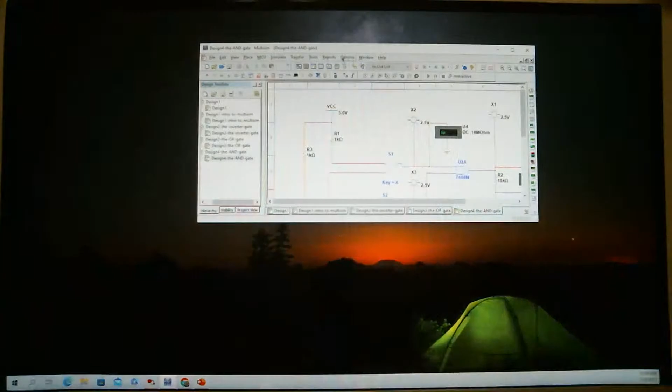All right, let me go ahead and minimize this. Give me a second. I want to start out with MultiSim. Okay, I'm going to minimize this for you and move this over. So making the switch here to MultiSim. Let me see if I can stretch this window a little more.

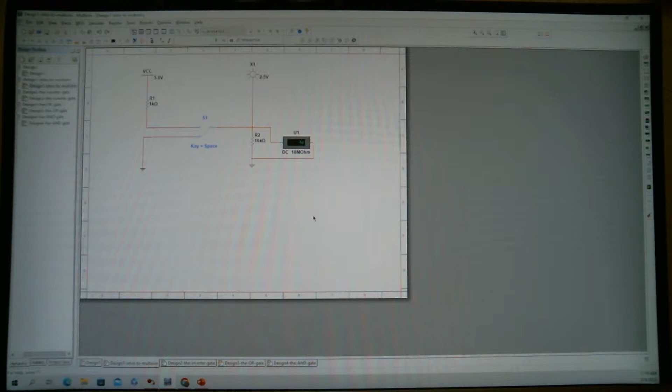Once again, thanks guys for your patience - my live streaming software wasn't working too well, so I had to work a way around this. Here is a design in MultiSim. Let me just start with the first one. So here is a little design, and this is using MultiSim - this is actually the desktop version of MultiSim.

What we've got here is a little small design that consists of a pilot light with a drain resistor, and basically you can power up and unpower that light with that switch, as you can see. But before we do that, we're going to have to run the simulation. So I'm going to run the simulation. All right, simulation is running, and there is the light energized, there's the light de-energized, right? And we have a voltmeter across that resistor, which is a voltage divider, checking the voltage. So this is what you could do.

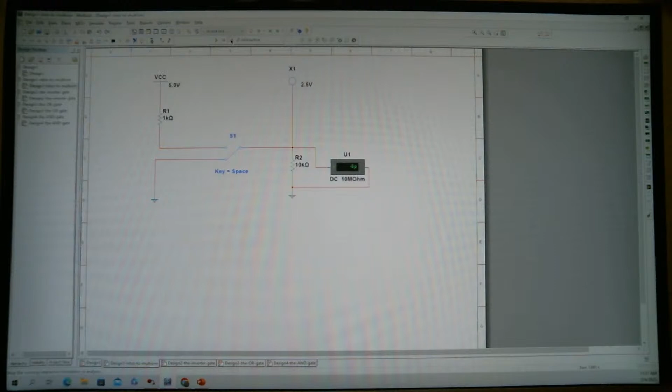They actually have 3D parts and components you can use besides just schematic. So this is an example of the use of Multisim. Let me do the second example with the inverter - this is a logic gate.

Let me arrange this. So this represents a logic gate, which is an inverter. And if we recall from basic digital logic gates, an inverter takes an input signal and outputs the opposite of that signal, right? So here we have an inverter that we can run and simulate, right? When the inverter has a 1 at the input, it provides a 0 at the output, right?

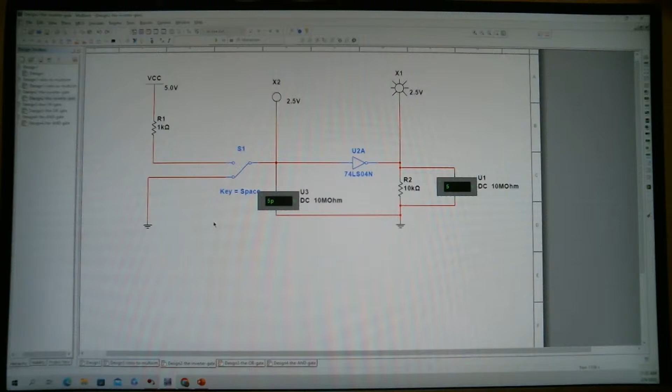So whenever the input is true, the output is false, right? And whenever the input is false, the output is true. So that's a design for an inverter, a digital logic inverter. Okay, so that's that one. All right. Again, I'm going to be working on maybe sending you guys the creation of these designs. It takes a little bit of creation. I'm just giving you a demo on the actual operation.

Okay, so here's another digital logic gate. This happens to be the OR gate. If you recall, the truth table for an OR gate has 2 or more inputs. And the idea is any of the inputs of an OR gate has to be true so that the output is true, right? In other words, if the inputs are false, the outputs will be false.

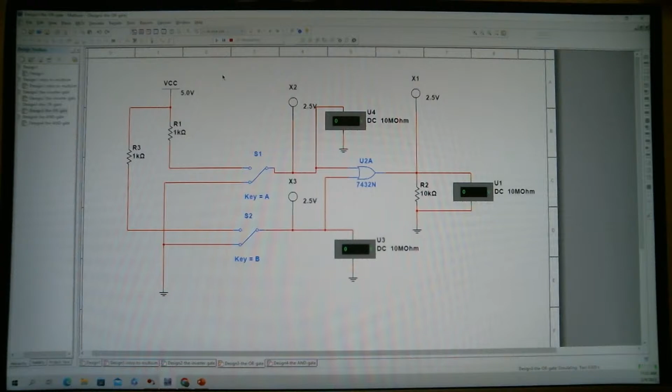So here is a representation or design for an OR gate, and I can make input A high, right? And the output is high. I can make input B high, and the output is high, or I can make them both high, and the output is still high, right? So that's a design for a simulation and test of an OR gate, right? So that will be the OR gate using Multisim.

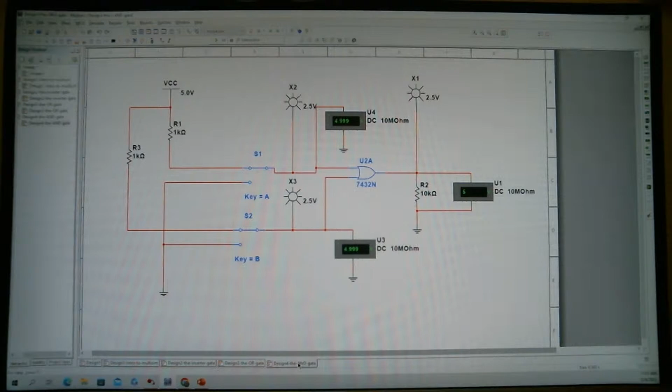All right, and lastly, we're going to do an AND gate. This is an AND gate for the test of an AND gate. We recall from the truth table essentially that all of the inputs have to be high before the output is high, right, for an AND gate. So let's run this one.

In this case, our inputs A and B for this particular gate, 7408, are low. Therefore, the output is low. If I make input A high, the output is still low because the condition is that all inputs have to be high, right, on an AND gate in order to have a high output. So this is a little bit of a rundown of digital logic gates using Multisim, right? So that is the use of Multisim for basic digital logic gate design.

And again, why do we use these tools? Well, part of the reason to use these tools is because it will facilitate the process of actually developing a product in real life. In the old days, when we didn't have these tools, we used to burn a lot of components before we got a product out, tested and prototyped. Nowadays, you can design, simulate, test on the virtual workbench, if you will, and once you know that the system is going to work, then you go ahead and implement it. That's actually a common practice pretty much across all technical industries.

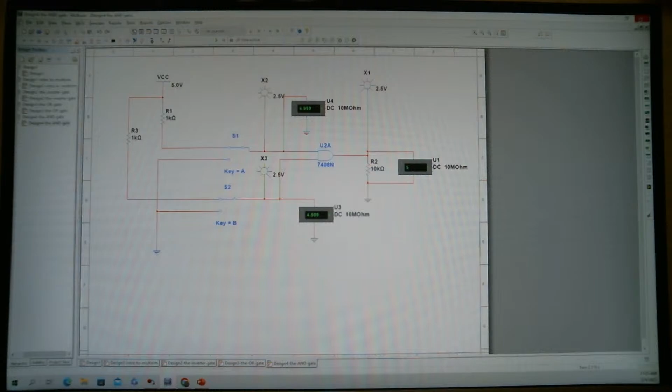We're doing pretty good. So far, we talked about the various software tools, and we also have introduced one of those software tools, which is Multisim. I am going to go ahead and start the second package here in a minute, if you guys don't have any questions.

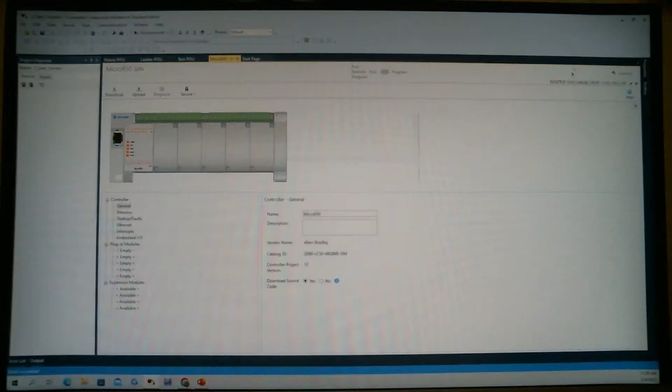Sorry about my pet. My son's dog, she's barking, so I'm sorry if you guys can hear that. That happens these days when you're doing remote work.

So, okay. So here I have one of the prime automation and control software. It's called Connected Components Workbench, CCW, right? CCW.

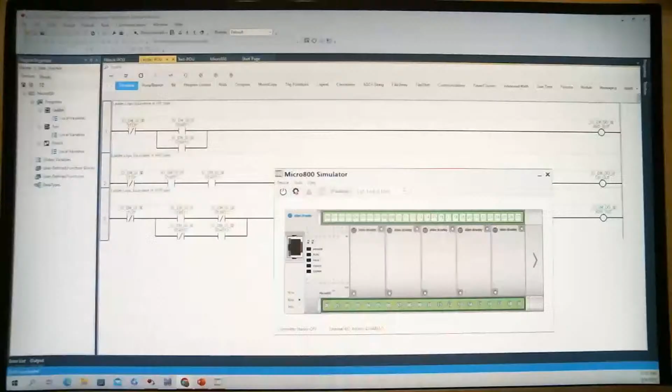Where is the simulator? And I can test my project. Give me a second here. I'm trying to see where my, oh, here it is. I have to move it over. So here's my simulator. You guys can see it. So that means I am testing a design, and I can potentially send that design to a 3D simulator that looks a lot like the actual hardware, okay? So if you're not too familiar with automation and controls, don't worry about it. I'm just giving you kind of a demonstration.

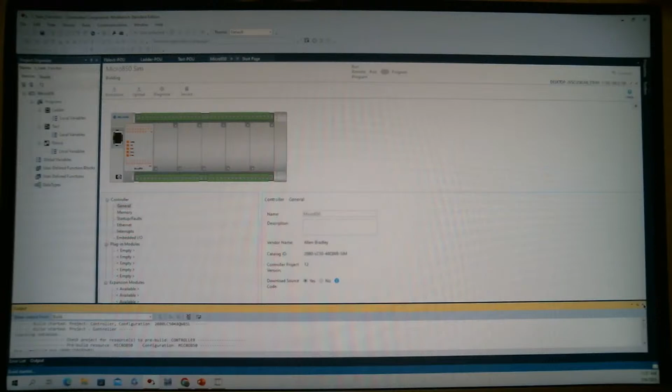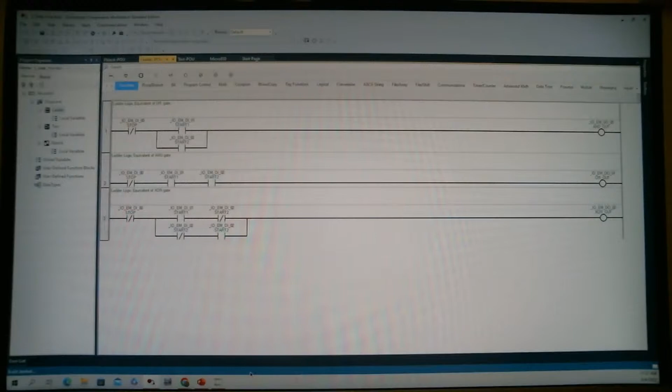Okay. And yeah, so nice. We got the program built. You see that? It's compiling, no errors. Okay, that's awesome. And I'm waiting to have another good message in here. All right, so it looks like we have no errors in here. Everything was built correctly. So I am going to go ahead and see if we can start running that.

Okay, build successful. So this is what you normally do, right? You have a program and then you have to download that onto the controller. Once succeeded, let's see, we place this in run mode. Okay, so I am going to do a download one more time. This usually takes about a minute or so to get that download taken care of. So that's what we're doing, downloading the program.

And once it's downloaded, then I'll give you a demo on running this particular application, which is the ladder logic or code to run a motor with a PLC controller, right? That's what we're going after. We're running a motor with a PLC controller. All right. And of course, I'm running a number of applications on my laptop, and hopefully everything's going to be good once we get to the end.

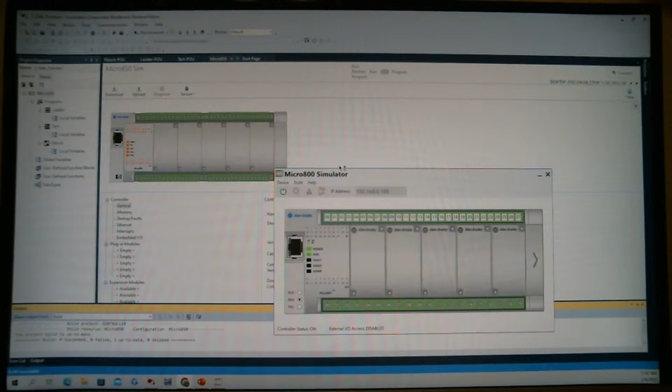Any company looking for automation controls PLC programmers will pick you up as a PLC programmer because you have domain over multiple languages. And you'll say, why is it that we have so many languages? Why don't we just have English, right? Well, because we need those other languages to do business with, like Spanish, Italian, French, Portuguese, Cantonese. In the realm of industrial applications, we've got to have multiple languages to be able to interact with various kinds of software applications and companies and so on.

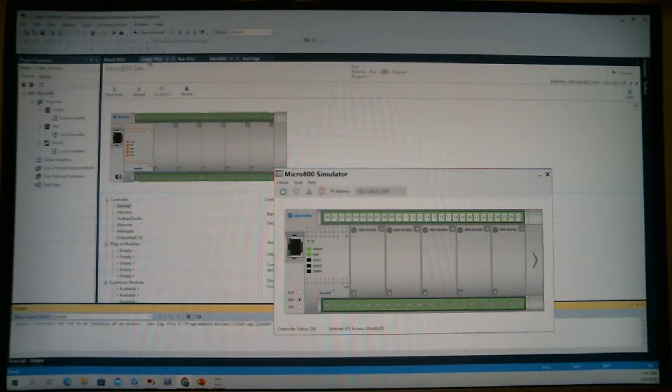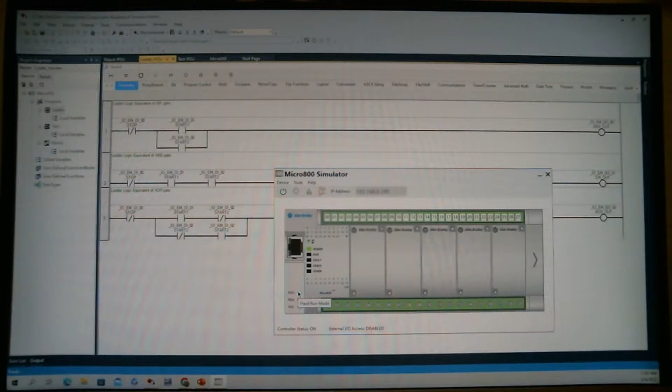So anyway, it's taking a little bit. Let's see. Okay, might have a little issue, but let's just see here. So there's our ladder, and there is our program. It says ready. So we're having a little bit of an issue. And again, it's probably computer power that we're dealing with. You can see that my inputs are being recognized correctly, right? All the inputs are being recognized correctly. But I have a little delay here on the actual output.

And I don't know what's happening. I'm trying to manage multiple screens in here to see if I see any error. All right, so thanks for your patience, guys. This is what it is. And so anyways, you can see here. Oh, here we go. You see that? So now our system is working. Our system is doing exactly what it's supposed to do. You see that? Our outputs are working.

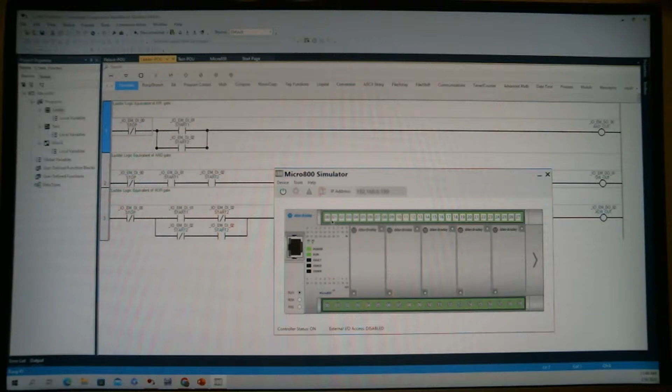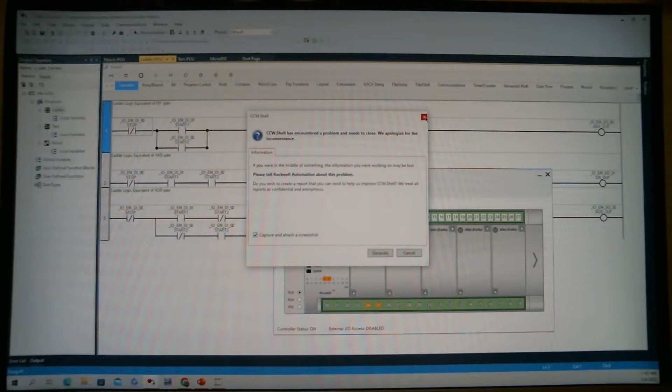Okay, now I'm missing one more thing here. What I'm missing is that my ladder logic up on top should also be illuminated. The inputs and the output should be on as I turn. Okay, oh, there we go. Let's see. So here we go. You see that? So we had an error here, and I'm sorry that we had that error. I just want to show you real quick here that the ladder portion of our program is working. I wanted to show you a couple more before we move on, and our time is getting short.

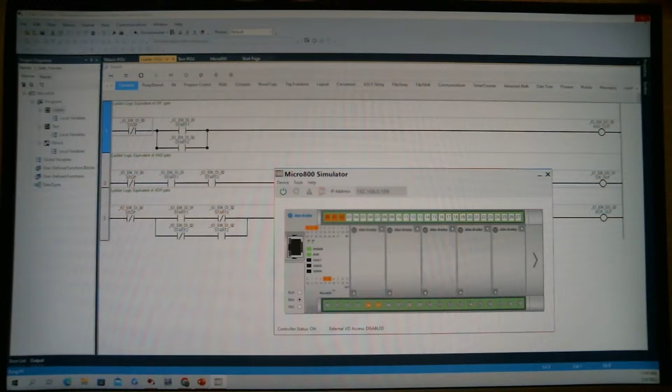But whew, it looks like my software collapsed. My software is collapsing, and I'm going to have to let it go. Sorry, I'm going to have to close the software. So it's collapsing, but you got the point, right? Sadly, I couldn't show you the other two programming environments, which would have been structured text and function block. But you got an idea, and hopefully that idea will help you become a PLC programmer of some sort.

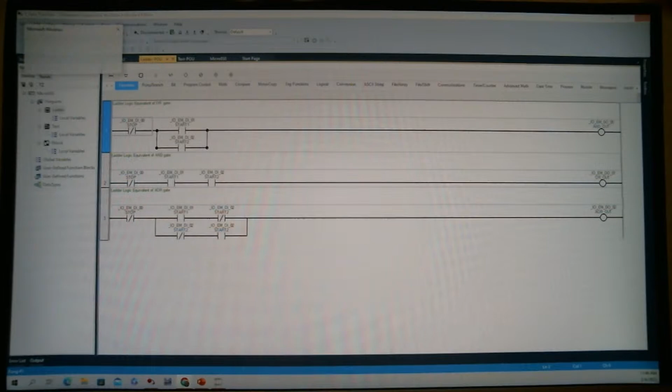Are you guys still with me? It looks like we might have a glitch on the system. And if we have a glitch on the system, it looks like this might be the end of our live streaming. So okay. Are you still with me? Okay, we're almost at the end of our presentation. And I only had one more thing to show you here. I'm going to end this process so we can close our presentation.

Okay. So I'm going to have to close the program. I don't want to delay anything else here. I'm going to close this program. Thank you guys for your patience. These are real things that happen in presentations like these. We're not perfect, right? So I'm going to close out this one, and I'm going to do a last item to present. Let's see. I already had it, so let me.

Okay, so the last one I'm going to talk to you about is a wonderful tool called Tinkercad. I already talked to you about that. With Tinkercad, there's a lot that you can do. Tinkercad is free for educators. You might be able to get an account, and it's another wonderful tool that you can use for the design of software, to be able to do electromechanical software-based programming, design, testing, modeling.

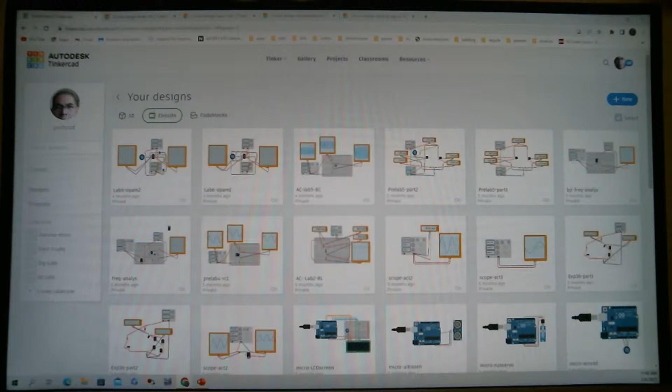So I am going to pull up here an example. It's a simple example of a very simple system. It really is a power source, a relay, a switch, and a lamp. That sounds like a flashlight, right? So imagine that you're producing the greatest and latest flashlight. Well, you can use Tinkercad to model your project. And so this is my prototype for that.

Okay, so that's my prototype. And you got all these tools to build this stuff here with Tinkercad. That's awesome. And let's go ahead and run it. You have to run the simulation. And now I can test my product, right?

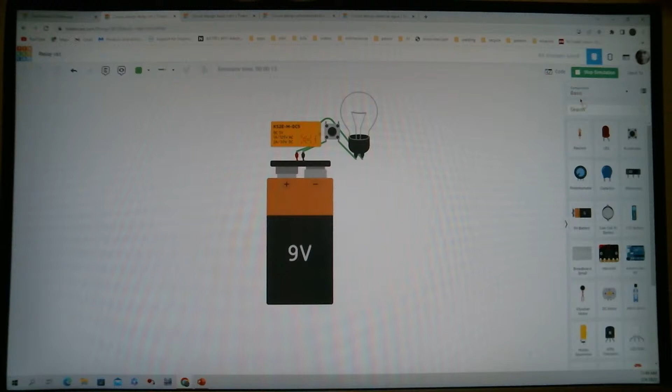So that's the greatest and latest flashlight, which uses a 5-volt relay as a way to enable the output, which is the light in the case of this flashlight, right? So that's one product, right? Let's do another one.

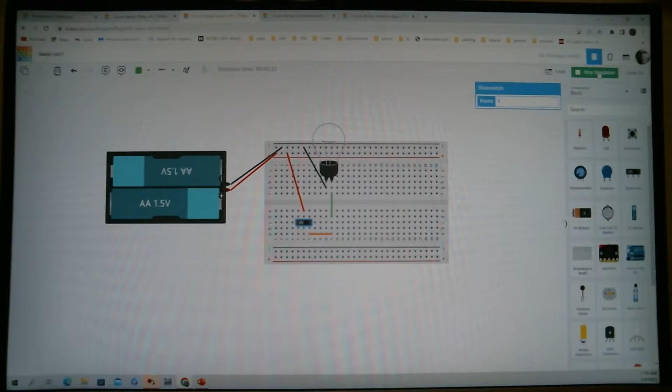I'm gonna give you a word of caution. It's not perfect. I have found some weaknesses in the software, but for what it is, free and 3D cloud-based software, it's pretty good. So I use it for a number of different trainings and projects that I've done in the past. Okay, so that's one product.

Here is another one, a very simple design. Now, what I'm introducing on this little demo here is the ability to check current, right? So here's a circuit that consists of 2 batteries, that's 2 power supplies, along with a resistor, along with a light-emitting diode, along with a switch. So once I run this,

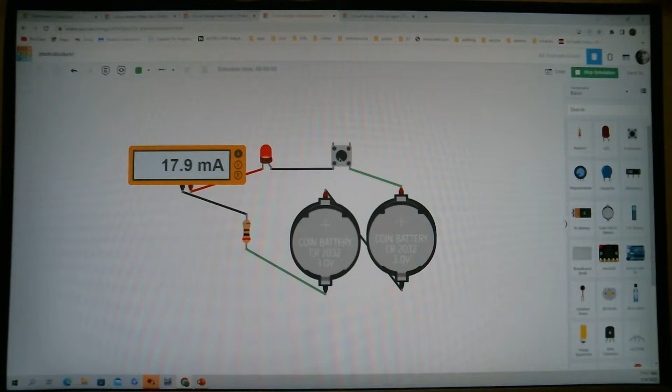I can do the same, right? I can check for the current. And I have an ammeter connected that is doing exactly that. How cool that is. Very cool. Okay. And then lastly, we have a design.

Will you promise me, guys, you're not going to break the intellectual property rights here? This is actually an actual prototype of a product that I'm working on. This is an actual prototype. Yes, Texas Iguana. I'm gonna add that. Yep. Thank you for that. So this is an actual prototype. I have a prototype for a problem that I have encountered that I'm solving. And so here is an actual project application.

On my product that I'm prototyping, I need to be able to sense moisture or water leaking. And I have three sensors in here, right? These are three sensors that will detect moisture, water leakage. They could be just sensors of any type. They could be pressure sensors, flow sensors, level sensors. And I want those sensors to send me a signal over to an actuator. That actuator could be anything, could be a motor, could be a light, could be an alarm.

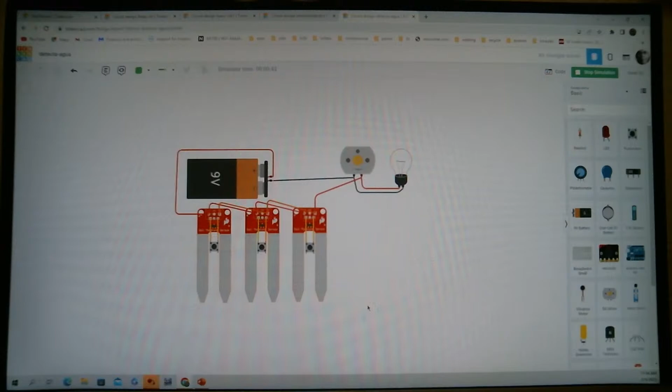This sensor can be located at various spots in the location or building where humidity or liquid levels are perceived. And this sensor could be sending a signal over to a place to be able to actuate or run an actuator or some kind of lights and alarms. All right, so that is my last demo.